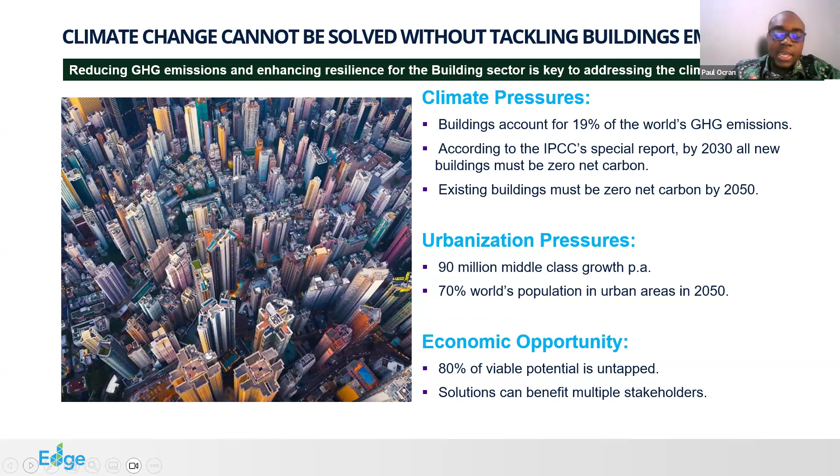So again, the climate issues are staring us in the face. Buildings account for a critical part of that. What can we do? It poses a risk and also an opportunity for us to take. So for us at IFC in the real estate sector, we've been able to look at the issues in two broad terminologies around climate change solutions: one, climate change mitigation, and also climate change adaptation.

So we have three critical tools, or three critical softwares, which are accessible to anybody to use online. One of the software is called EDGE, which we are going to go deep into today. EDGE, as I said earlier, stands for Excellence in Design for Greater Efficiency. It's a software developed by IFC to make sure that when you are putting up your building, you're able to assess the sustainability metrics of your building in terms of energy, water, and the embodied carbon in the material.

So Edge focuses on the building as a whole, right? Then we have another tool called Apex. Apex focuses on large cities.

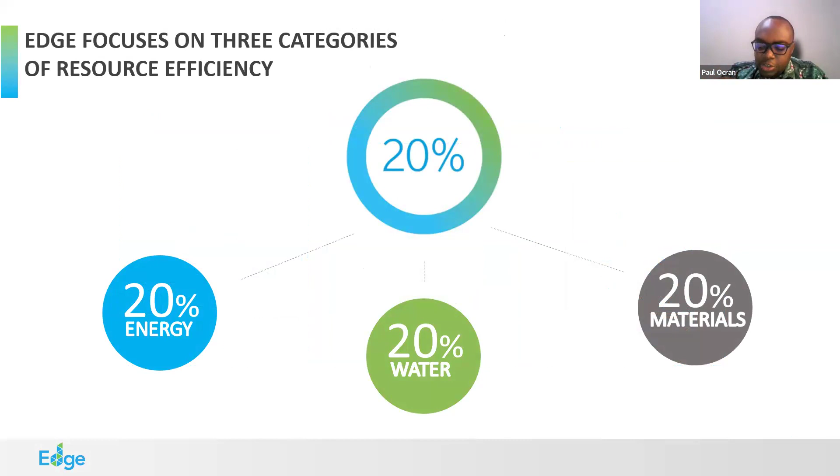As I said earlier, Edge focuses on 3 key parts: the energy used in the building, the water used in the building, and the materials of construction, which literally translates into the embodied carbon in the material.

But Edge certification has 3 levels - level 1, level 2, and level 3. Level 1 is called the Edge Certified project. So you demonstrate, after using the software and providing all the evidences, and going through the certification system, that you meet 20% on energy, 20% on water, 20% on material. You are issued the level 1 Edge Certified building certificate.

Then level 2, you go beyond the standard, so we call it Edge Advanced. That means you are doing way more than what is required in the market. For that, you demonstrate that your building is at least 40% more energy efficient than what pertains in the market. On water, you can do at least 20%, and on materials, you can do 20%. Then we have the ultimate goal, which is level 3 - the zero carbon certificate.

Which is also an operational certificate. So to achieve the level 3 certificate, which is zero carbon - initially I said that by 2030, all new buildings must be zero carbon. By 2050, all new and existing buildings must be zero carbon if we want to meet the climate goal in terms of the building construction sector.

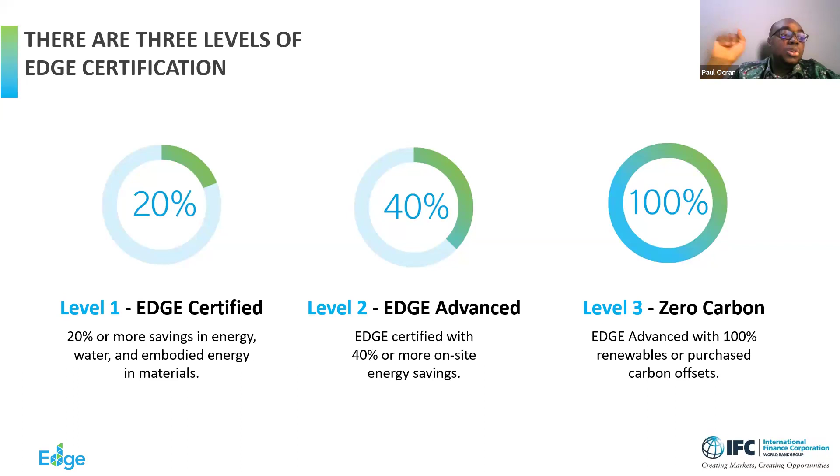Or you purchase carbon offsets to offset your consumption. So for zero carbon certification, you need to meet the Edge Advanced mark, operate your building for at least 1 year, and demonstrate that all your energy use is coming from a renewable energy source, or purchase carbon offsets to offset your consumption.

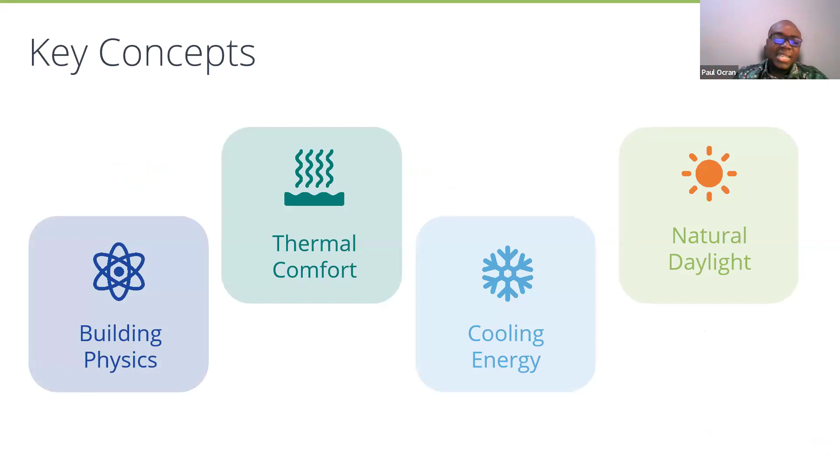But in this whole building sector, what are the key elements that we look out for? What are the key concepts? The key concept is around building physics - how are you orienting your building? What is the heat gain into your space? Because buildings perform differently based on different climates.

A critical part for you to know whether your building is going to be efficient or not is based on the location of your building, the climate of that area. You can't compare a building built in Accra to a building put up somewhere in Canada in a very cold region, because of the different climate. So you need to design based on your location.

That's why it's not always a good idea to have all these all-glass buildings here in this part of the world. So you design based on your location, which is critical, and that's a critical aspect of building physics. Based on this location, this is my climate, what is going to be the heat gain, what am I trying to achieve?

I don't want much heat into my space. I want my space to be thermally comfortable. That's the next concept. In your space, wherever you are now, when the temperature is too high, you will not be comfortable. Then you are looking to open your window, put on your fan, or if you have an air conditioning system, you close all your windows and quickly switch on your air conditioning system. So thermal comfort is also critical.

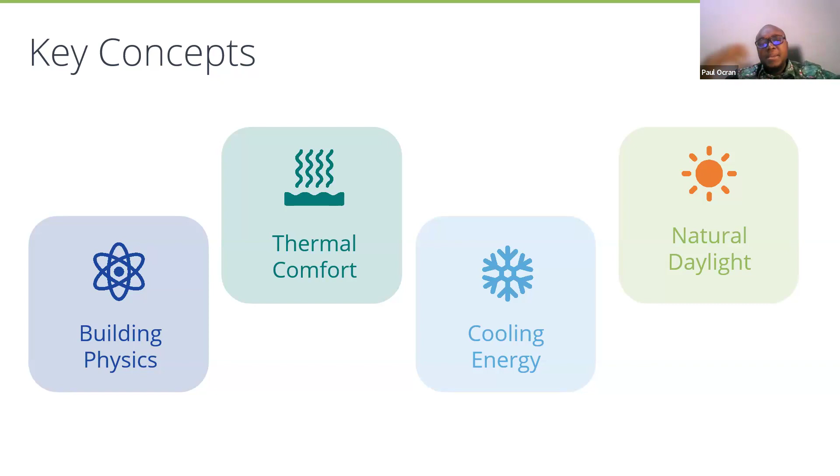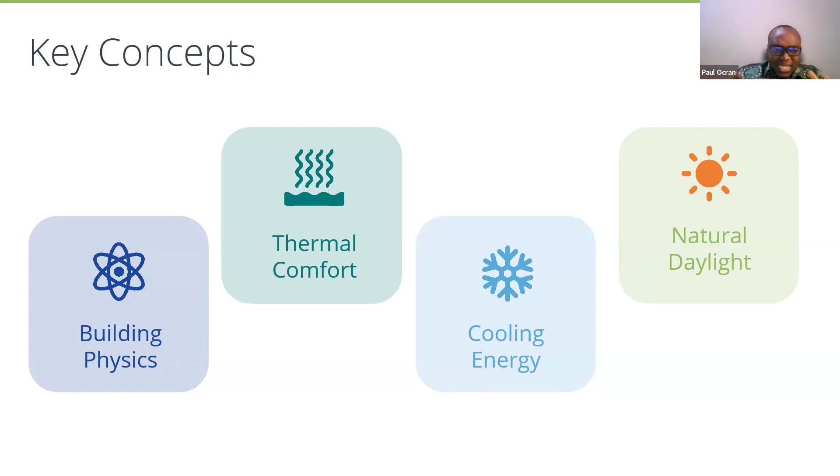So all these are quantified. Mechanical engineers come to design your cooling system. And how can I balance natural daylight in my space against artificial daylight? How can I maximize daylight in my space? These are the key concepts and balancing that you will need to do to achieve a good building and a green building.

So the real issue is finding a balance between the energy used in the building, your thermal comfort, and the natural daylighting system that you need for your project. It is all about balancing the wheel - not having too much windows, which will bring in a lot of heat into your space, balancing it with natural daylight, having shading devices over your window, and making sure you have a very close loop in terms of your energy use, thermal comfort, and the natural daylight.

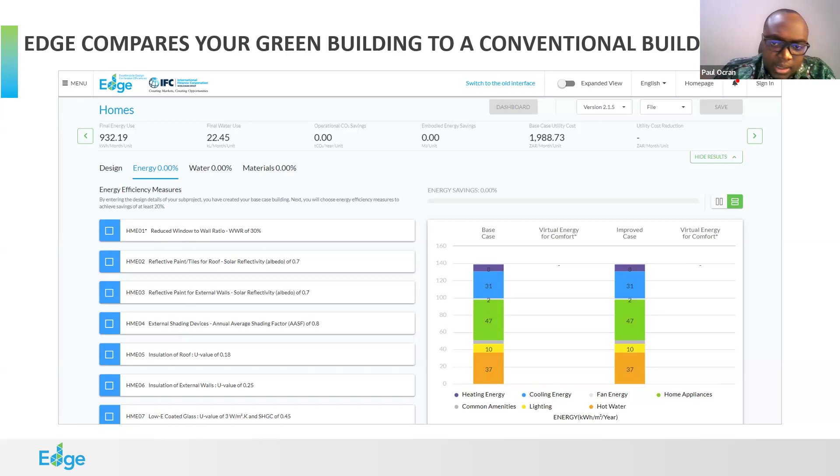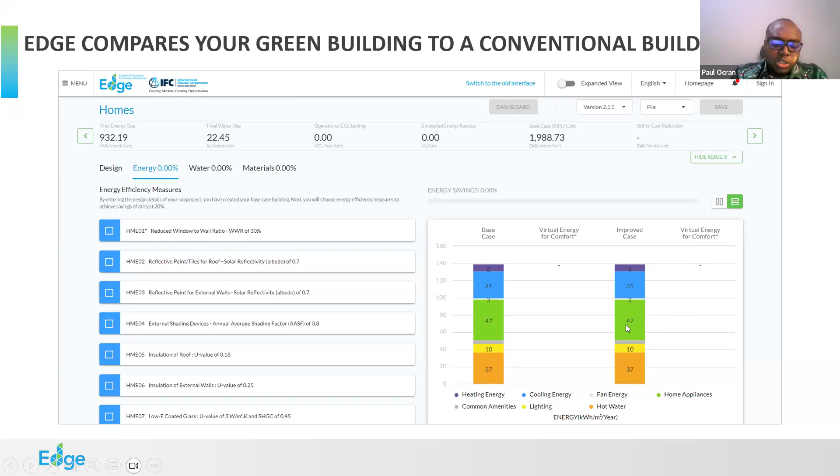So you design your building, it gives you your energy, water, and material. What it does is look at your design and develop a base case based on the market, and compares it with what you are implementing in your building. So the difference between what you are implementing in your building and the base case is now the savings that you will achieve, and you need to demonstrate whether you are meeting the standard or not.

Based on your design, a base case is developed, and this base case is developed using local building practices, local building systems, the building code, international building regulations as well, and other ISO certification systems. So it develops that base case for you. Then based on what you are implementing in the building, it shows whether your building is green or not. If you check the graph, that's the base case, and this is the improved case - the difference is now your saving.

So when we talk about passive design concept, as I earlier talked about your building physics - how are you able to design using passive design concept? These are questions you will need to ask yourself when designing your building. Do I need to insulate my building? Yes, you will need a lot of insulation based on the climate.

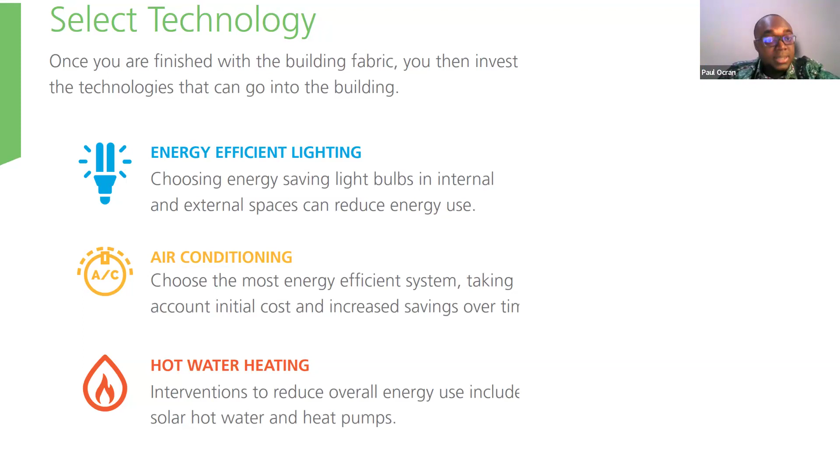So those are passive design concepts that can be implemented by a very good architect and support. Then you move to technological intervention, which I also call active design, around what type of lighting am I using in my space? Are all my lights energy efficient? Are they smart? Are they sensed, so that when I go into spaces I don't normally use all the time, like in offices, when you go into the washroom, you have a sensor that senses your presence and puts on the lights and puts it off again. What is the efficiency of your AC system? How efficient is your hot water heating system as well? So what are the technological interventions you want to implement?

So after all this, the program is directed for everybody, but we've seen a lot of uptake from developers. So what are the key reasons driving developers to choose certification of their building, even Edge?

One of it is everybody wants to sell faster, to have a quicker sales cycle, because the demand for green buildings is there, since they are efficient and have low cost of operation. So everybody is demanding a green building. It gives them a quicker sales cycle, leaner investment in terms of marketing, because they can just slam the certification on their marketing systems, and that pushes their brand even further.

There's customer satisfaction, brand visibility, again operational savings for the client as well, for investors in this project.

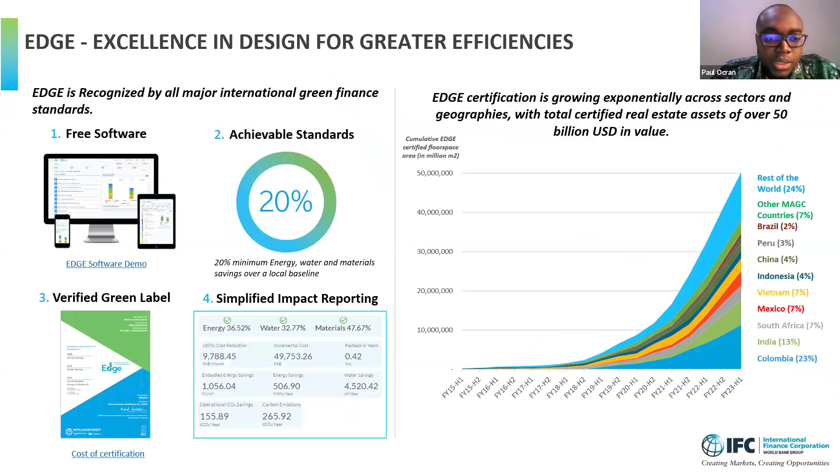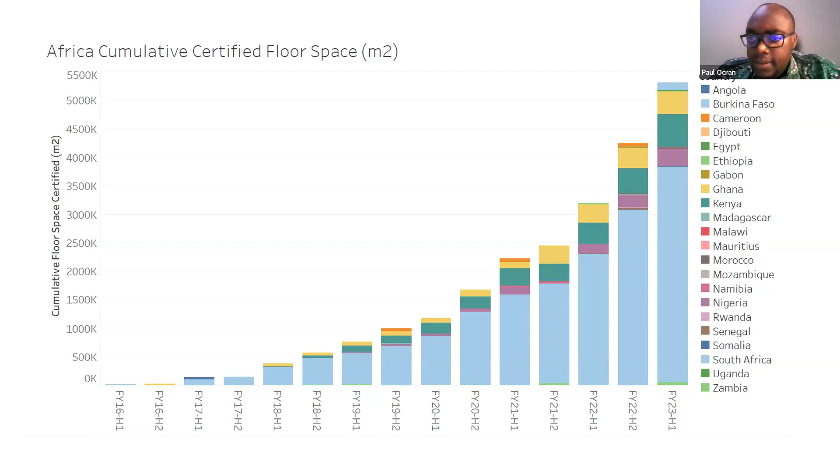Ghana is doing very well in this, and we've seen a lot of uptick there. This is basically the timeline: the program was launched in 2017, and we had our first certified project, the mother baby unit at Komfo Anokye Kumasi. Then in 2018, we supported the government to develop and launch the building code.

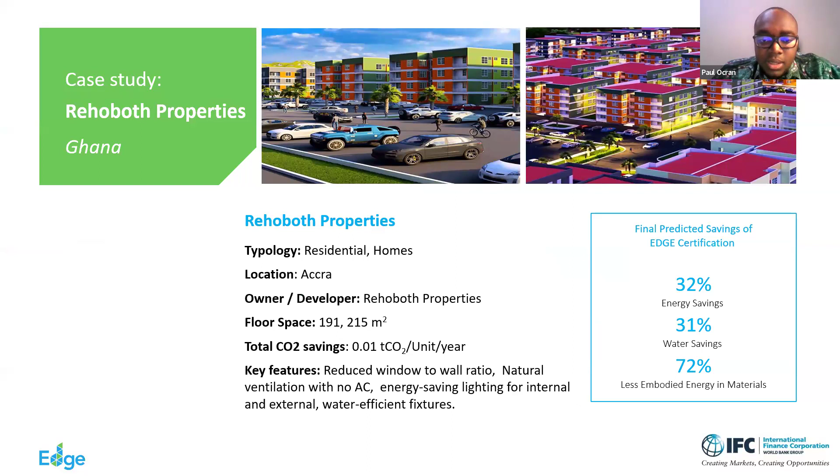We've seen Rehoboth Properties demonstrate at least 32% savings on energy, 31% on water, and 72% on embodied energy in the material, with a total floor space of 191,000 square meters, saving 0.01 tons of CO2 per year. You also have Genesis Residences as well, also in Ghana.

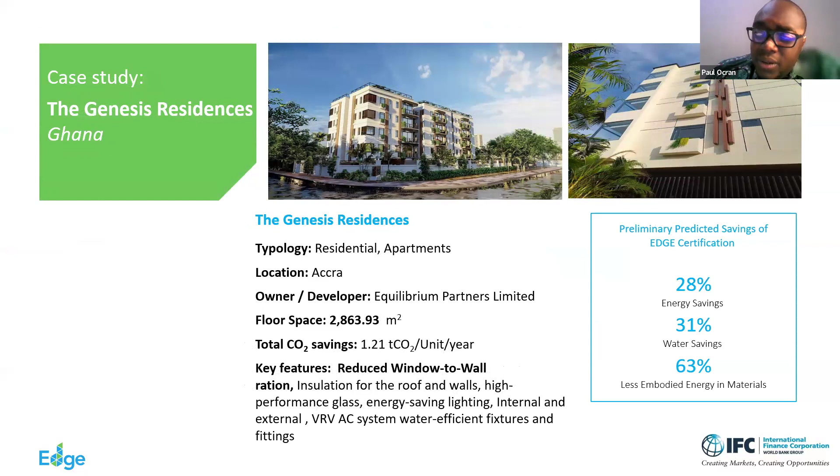In Ghana we have over 26 projects; these are not all, I just picked a few. This is the National Home Ownership Fund as well. Some of the projects you can find on the website edgebuildings.com. Then there's National Home Ownership as well.

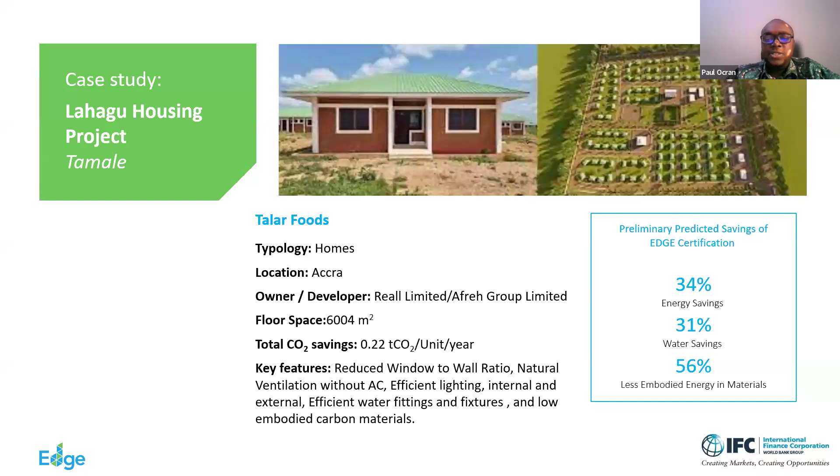This seems like a partnership with the government, and their project is even EDGE Advanced. You could see even affordable housing in Tamale, Lahagu housing, showing interventions like reduced window-to-wall ratio, natural ventilation, efficient internal and external lighting, efficient water fixtures, and low embodied carbon material. I'll bring up one more place, and that brings me to the end.

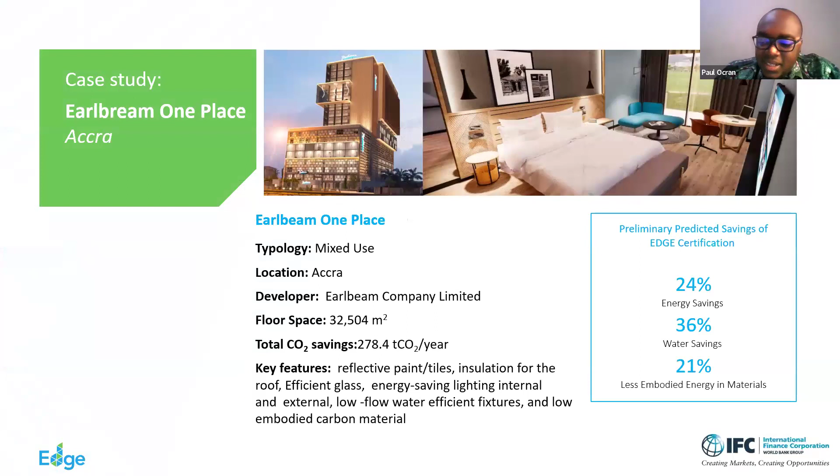EDGE is currently supported to be free — this powerful software is free. EDGE is supported by the UK government in Ghana, with initial funding from SECO, the Swiss government, earlier. I think I'll stop here and I'm happy to take a few questions.